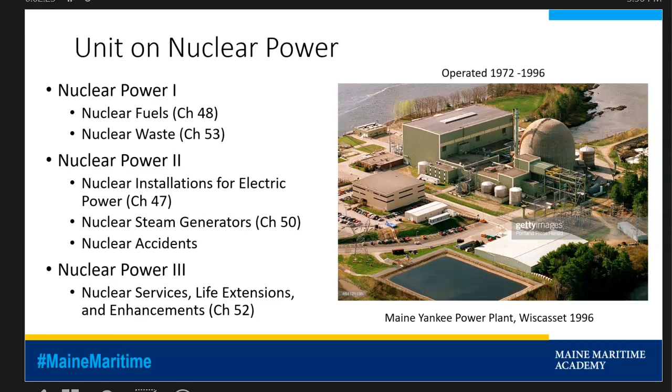Here's another place that you can get information from if you're curious, and this is also where a lot of this information came from in this PowerPoint.

There are only 2 nuclear reactors being constructed currently. That's the Vogtle Units 3 and 4 in Georgia.

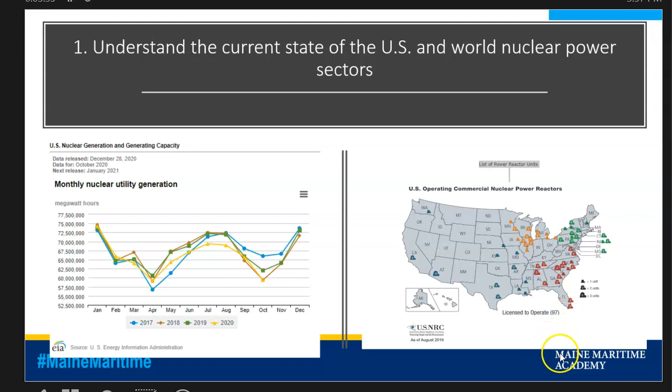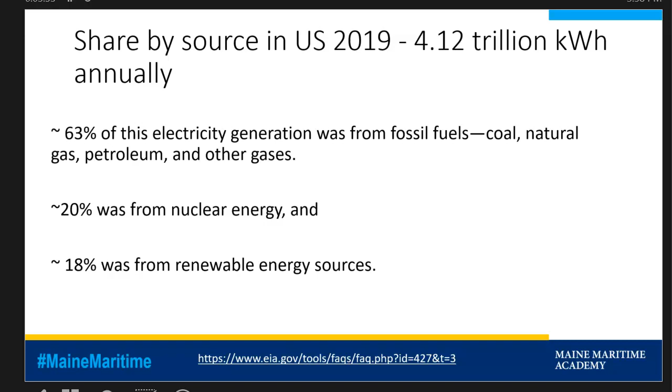So you can read this: 63% of electricity generation is from fossil fuels - coal, natural gas, and petroleum other gases. 20% was from nuclear energy, and 18% was from renewable energy sources.

TWh is terawatt hours, and basically this just shows how much of the world uses what type of fuel for power generation. You can see that coal is a big portion of it because it's so cheap. Fun fact, if you don't remember this, the U.S. is like the Saudi Arabia of coal, as it's for oil over there. So that's pretty cool. And nuclear is just this little 10%.

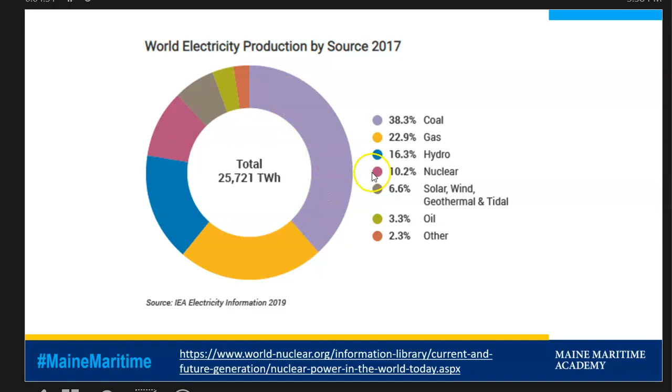In the U.S., we generate the most gigawatt hours, or the most hours of nuclear power, but it is not our main source of power generation. I believe we only use about 17% of our generation as nuclear power, as compared to France at 71%. So I think that's on your note sheet as well.

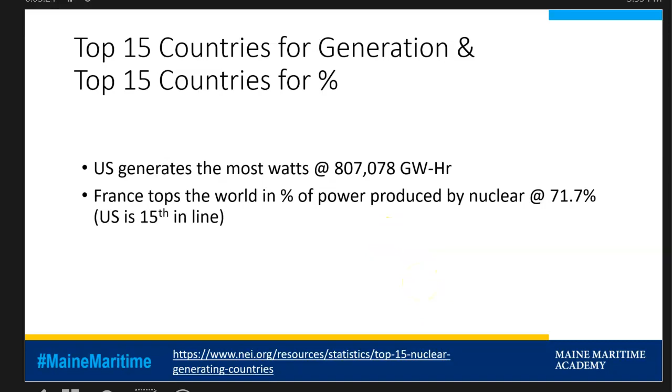From the atomic weight, bingo, most of the uranium is U-238. There's only 0.01% of U-234. There's 0.71% of U-235, the magic stuff that we typically use in a power plant. And 99.28% is U-238, natural uranium.

U-234 is such a small amount, it is insignificant. U-235 is fissionable, meaning it can absorb a neutron, become unstable, and split into multiple pieces. U-235 can sustain a nuclear chain reaction. This fission releases a massive amount of heat and is the basis for steam generation.

U-238 by itself cannot sustain a nuclear chain reaction, which is known as fertile. However, absorption of high-energy neutrons can cause U-238 to fission. Because U-238 by itself can't sustain the chain reaction, we need to have enough 235 to initiate fission and drive the chain reaction. Therefore, we need to enrich the uranium in order to use it as nuclear fuel. Fun fact, when 1 ton of U-235 fissions, the heat release is equal to burning 3 million tons of coal. That's insane.

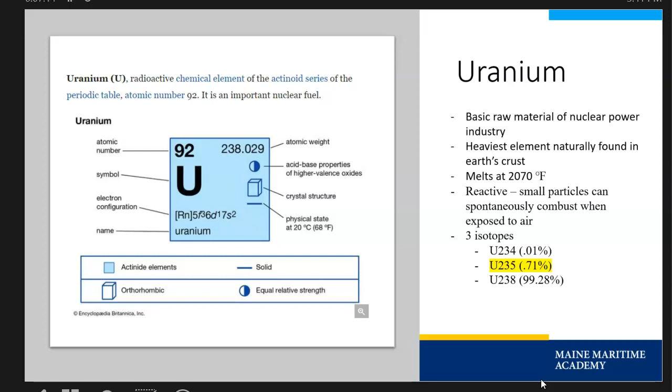Plutonium is a radioactive element with an atomic number of 94 and an atomic weight of 244. It is the only element with 6 different physical forms. Plutonium has a much lower melting point than uranium, but it must be melted in a vacuum or in an inert atmosphere because it is chemically very reactive to oxygen. All 15 isotopes are radioactive, decaying to stable isotopes of bismuth and lead.

The most commonly created isotope is plutonium-239, and it is primarily the product of fast breeder reactors, which are specifically designed to produce more fuel than they use. You can read more about fast breeder reactors in your book. They are basically reactors that make a little extra neutrons so that they produce even more chain reactions than a normal pressurized water reactor.

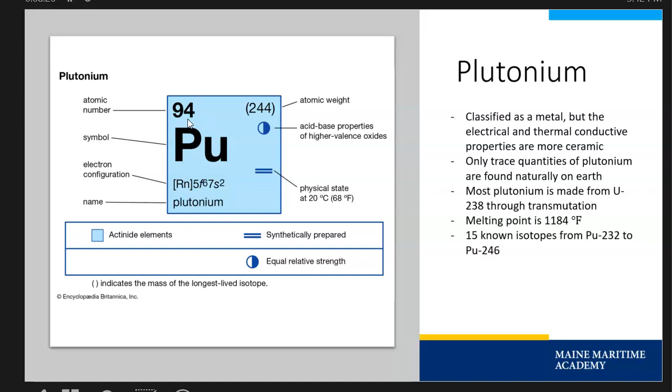Thorium dioxide is used to make gas lamp mantles because of its extremely high melting point. Because of its abundance, there was a great deal of research conducted using thorium. Absorption of neutrons in a nuclear reactor converts thorium to U-233, a fissile isotope that is not naturally occurring. There are no commercial reactors in the world that currently use thorium as the reactive element for nuclear fuel.

Proponents of thorium fuel claim there would be less nuclear waste production if thorium were used in a reactor. Supporters say there is low weaponization potential in thorium, unlike uranium and plutonium. That very detail, that thorium can't be used in nuclear weapons, is the reason research was halted in the U.S. in the 1970s. It's a pretty interesting fact. If the government has no use for it, neither do we, apparently.

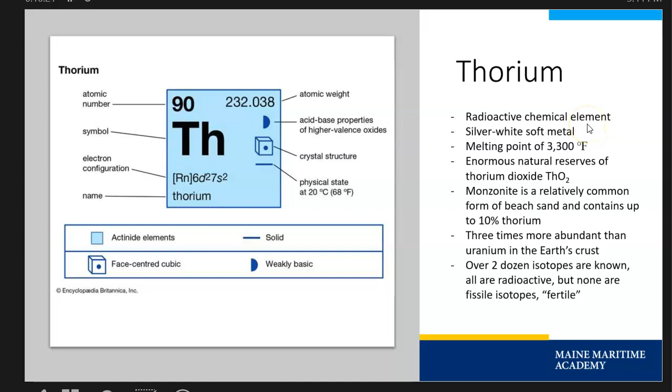But I've actually looked online because I was curious about this thorium. There are some pretty cool reactors called LFTRs that use liquid sodium or something like that with these thorium reactors, but they're all theoretical. There hasn't been enough research behind them. So just know it is one of the radioactive elements that could be used in a reactor, but we just haven't used it.

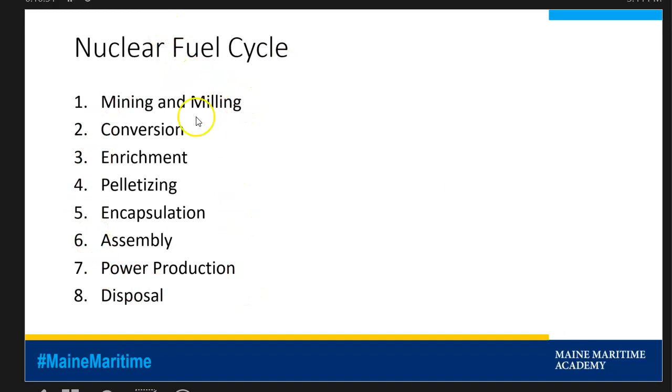Nuclear fuel cycle. These are things you need to know all about, and we're going to go over them.

Open pit mining, also known as strip mining, removes surface soils and rocks to get the uranium ore below. Uranium ore grades are usually less than 0.5%. Once the ore is exposed, a series of benches or steps are cut into the earth to make ore removal easier. Benefits include better ventilation and it's less expensive than underground mining. Downfalls are a huge footprint, waste piles, and remediation is extremely costly. Nearby communities can be negatively impacted due to dust, noise, and groundwater contamination. So no one likes to be neighbors with this thing. But who wants to work in a mine where you get radioactive black lung, right?

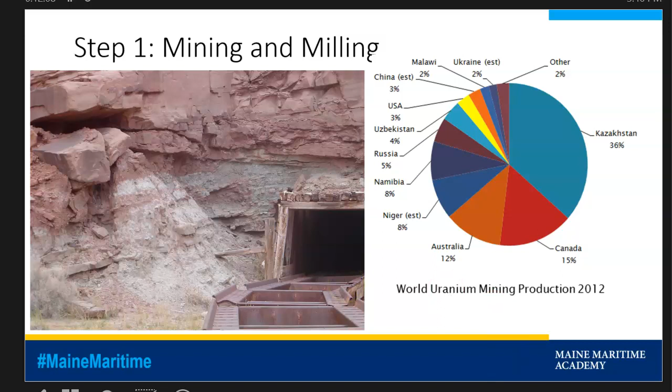Okay, moving on, underground uranium mining. Underground mining is used to reach higher concentrations of uranium that are too deep for open pit mining, usually greater than 350 feet. Uranium ore is dissolved by pumping solution underground, bringing it back up, and extracting the uranium from the solution. Benefits are a smaller footprint, less rock waste, and through advances in technology, less risk to mining workers. It's extremely expensive and there is potential for serious impact on local aquifers. Kind of like natural gas, you know. If we crack one of these layers and get into the aquifer, we're going to screw up a lot of people's well water.

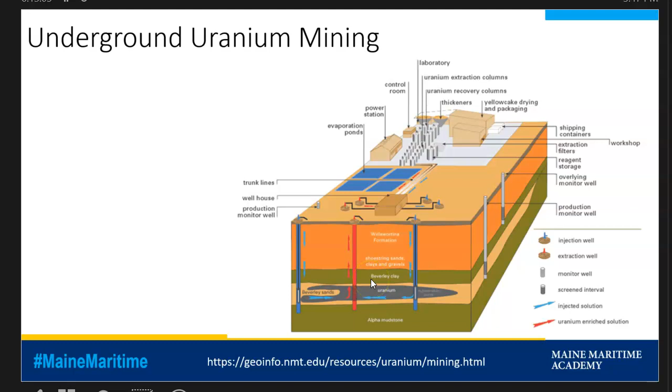Milling is the process where uranium is extracted and concentrated from the ore that has been mined. Ore is crushed and leached with acid and recovered using an ion exchange process. Excess water is filtered and roasted off. This milling process yields the yellow cake, which is U3O8.

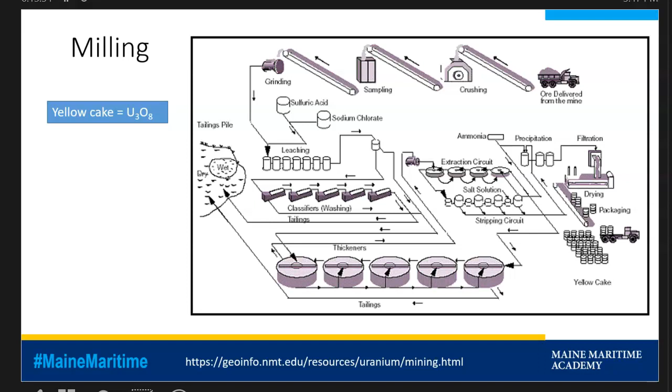It takes a ton of ore to mine 5 pounds of uranium. Only 0.25% of what is mined is uranium.

What you need to know here is that yellow cake is converted to uranium hexafluoride through a multi-step chemical process. Uranium hexafluoride is a gas, also known in the industry as hex.

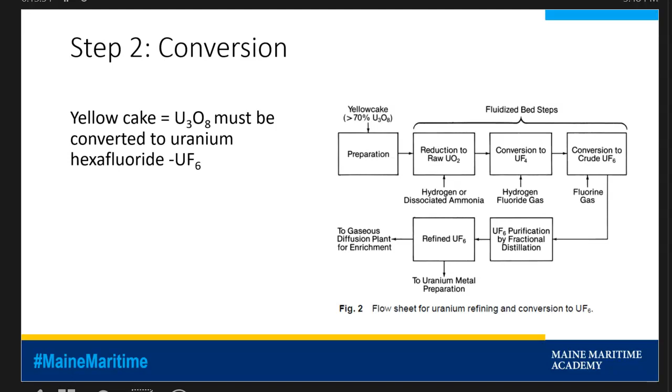At this point in the process, the uranium hexafluoride is at about 0.71% concentration of U-235. It is concentrated so that there is just the right amount of U-235 compared to U-238.

Through the enrichment process, the uranium concentration is gradually increased in a cascading method, either by gaseous diffusion or through a centrifuge. The centrifuge also cascades in nature and is done repeatedly until the appropriate concentration is reached. Only 2% of the energy is needed to enrich uranium during the centrifuge process compared to the diffusion process.

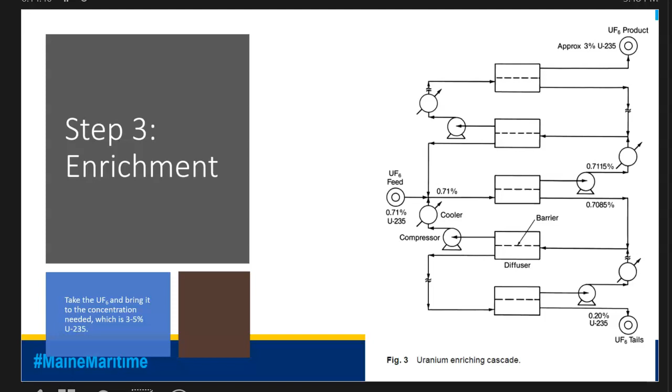So, pelletizing. The uranium oxide powder is blended and sieved to make a homogeneous lot. Powder is fed into dies and pressed into cylindrical pellets. Pellets are heated in a furnace at 3100 degrees Fahrenheit for 4.5 hours, ground and inspected.

A boron coating is added to the outside to help control the reactivity. You'll hear that boron chemical quite a bit in nuclear power because it is one of those things that slows down the chain reaction. It's also used as a moderator.

As a side note, this is how downblending occurs. Downblending is the process of taking highly enriched uranium used in nuclear weapons and reducing the concentration of U-235 to lower levels so that the fuel can be used in power plants.

In 1995, the Megatons to Megawatts program started downblending U.S. and Russian weapons grade uranium into LEU, low enriched uranium. From 1995 to 2013, the equivalent of 20,000 nuclear warheads were downblended to LEU.

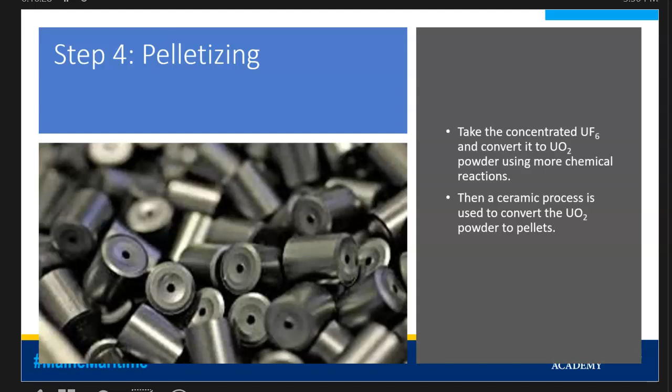Encapsulation, aka cladding. These tubes are made using zirconium through a cold tube drawing process, similar to what we saw in the video last semester on making tubing.

Each pass needed heat treatment, and there were several passes. Heat treatment occurs under a vacuum. Then the rods are cut to length. These are inspected several times. Samples are taken to verify the material composition.

Rods are put together so that the fuel pellets containing the proper amount of U-235 per rod are weighed and recorded. The stack of pellets is inserted into the fuel cap, which is welded to the cladding, and the upper level plenum spring is installed into the cladding.

The tube is then inserted into the weld chamber where it is evacuated, vacuumed out, and pressurized with helium. At the top end, the plug is welded. The rod is then checked for helium leaks.

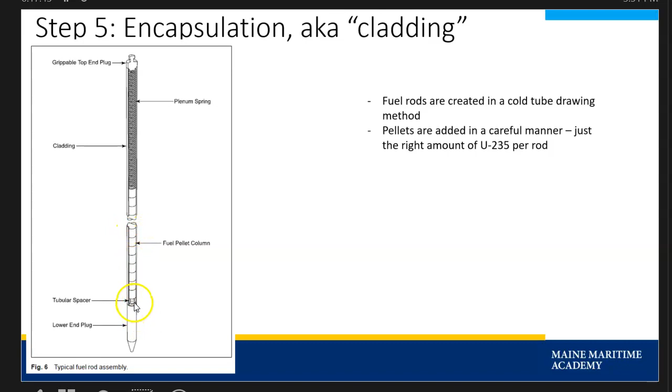So this is the assembly. The cladding's the outside part, and there's a little spring in there. Your fuel pellets are here. A little spacer for good measure, and there's a plug down here and a plug up here.

Assembly. Rods are then put together in these bundles. These steps are done in the horizontal position. There are upper and lower spacer grids that keep the rods in their correct position. Grids are made up of strips. Each strip is numbered and traceable.

The grid is laser welded at each strip intersection, meaning there are 500 welds per grid. All dimensions and welds are carefully checked. Grids are installed to fixtures to keep them steady.

The guide tubes are inserted and secured by welding them in place. Think of these like the stay tubes in a fire tube boiler. They provide rigidity and stability to the overall fuel assembly.

Fuel rods can then be inserted. They are scanned so that the correct rod is located to the correct spot in the grid. All is carefully calculated and documented. Then the assembly is put in the vertical position for inspections.

Bundles are shipped horizontally in licensed containers. There are usually 1 or 2 bundles per shipping container.

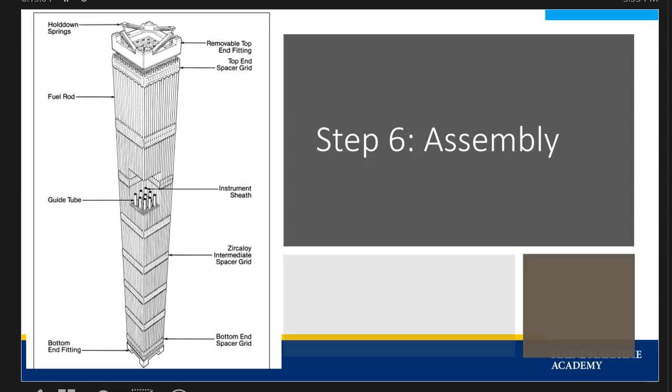The CANDU reactor design operates in a continuous refueling mode, so there is no shutdown required.

Most PWR, pressurized water reactors, were originally designed for annual refueling, where 1/3 of the fuel was replaced each outage. Through operational experience and data, the trend has been pushed to 18 to 24 months of runtime between refueling.

Fuel costs are higher when the shutdown occurs after more time has passed, but the longer the cycle, the more cost effective it is due to the overall reduced number of outages over the life of the plant. There are also fewer licensing submittals that need to be done, as well as lower replacement power costs. So less paperwork, less money, better to not have to do this so often.

Burnup is a way to measure how much uranium is burned, in other words, how much uranium has split inside the reactor, measured in gigawatt days per metric ton of uranium. Two decades ago, average burnup was 35 gigawatt days per metric ton of uranium. Now it is over 45 gigawatt days per metric ton of uranium.

This increased burnup capability means batch size reductions as well as longer cycles. Today's units are loaded with batch sizes once used for annual cycles and utilize a checkerboard scheme to replace the fuel bundles.

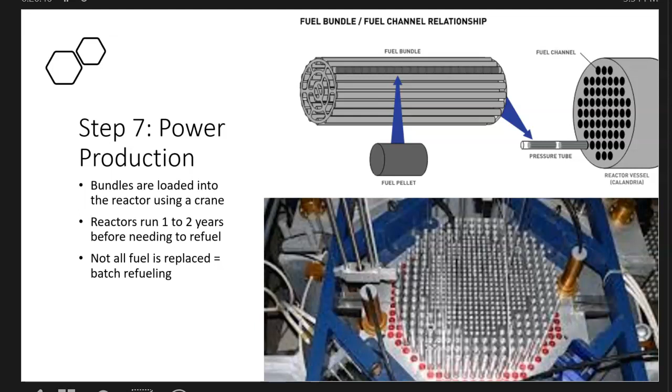As nuclear fuel is used, characteristics change. There are 4 things that happen, all dependent on the level of burnup of the fuel. First, dimensional structural changes of the fuel: there is growth, rod diameter can enlarge, and fuel density changes.

Second, the cladding, waterside corrosion, and hydriding. Early on during burnup, the cladding reacts with the water and there is a thin adherent oxide layer on the outside of the cladding. The oxide layer is impacted by the time the fuel is spent in the reactor. Neutron flux, water chemistry, and coolant temperatures must all be monitored.

Third, fission gas release. If there is a fission gas release, this can cause high internal fuel rod pressure.

Fourth, pellet cladding interaction, or PCI. This is when there is contact between the individual fuel pellets and the cladding. It happens when there is a rapid change in power level. The PCI occurrences have led to power maneuvering guideline development. It's also the reason helium is added inside the cladding, to help prevent this contact.

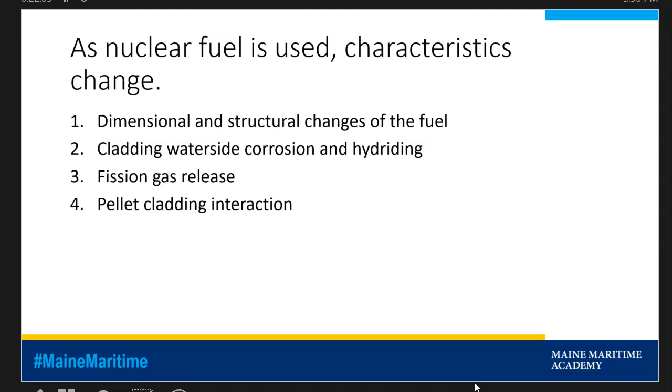Once the fuel is used, there are 2 options. Option 1: recovery of the spent fuel. Fuel can be reprocessed and used again to make power. This is the closed fuel cycle.

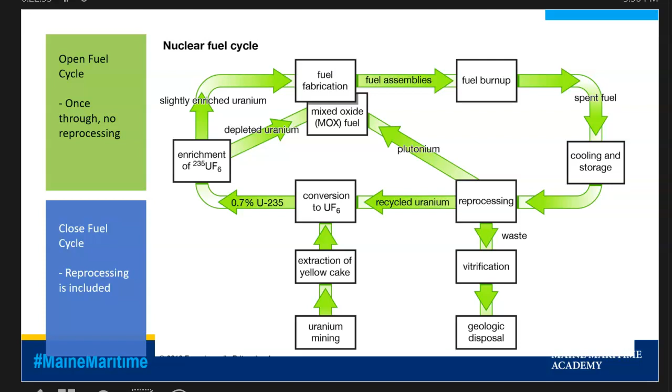Option 2: disposal. This is the open fuel cycle. Either way, the disposal of high-level waste requires safe, undisturbed confinement for hundreds of years. The goal of an integrated nuclear waste management program is to immobilize and isolate the nuclear material from the ecosystem until it's no longer a significant threat to the environment.

Since the 1970s, waste storage regulations have progressively been more rigorous. Every nuclear site was designed with the idea that there would only be closed fuel cycles, therefore they had only certain size spent fuel pools and did not plan to have long-term fuel storage on site.

In the 1970s, recycling spent nuclear fuel was banned in the U.S. The law was rescinded in the 1980s, but the damage had been done. Plants built later included designs with larger spent fuel pools.

The nuclear industry has met this challenge by working to produce less waste and have longer fuel cycles. Nuclear plants have re-racked fuel in spent fuel pools and utilized neutron-absorbing materials to lower reactions and therefore hold more spent fuel rods.

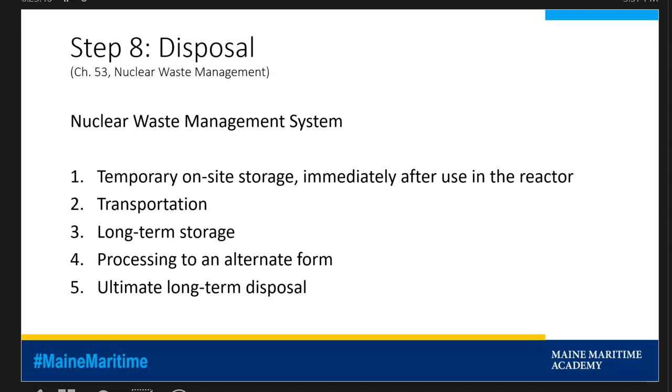Even with these changes, spent fuel pools can't hold all the fuel needed for the life of the nuclear plant. The level of radiation determines the handling and storage steps that are necessary. Above all else, we must protect the groundwater against contamination.

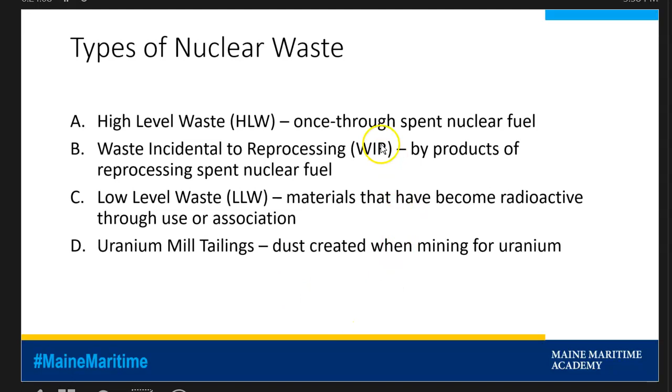Byproducts of spent fuel are liquids until they go through the vitrification process. This turns them into a solid. It's highly radioactive.

Federal facilities have been reprocessing spent nuclear material since the 1940s, such as from nuclear submarines.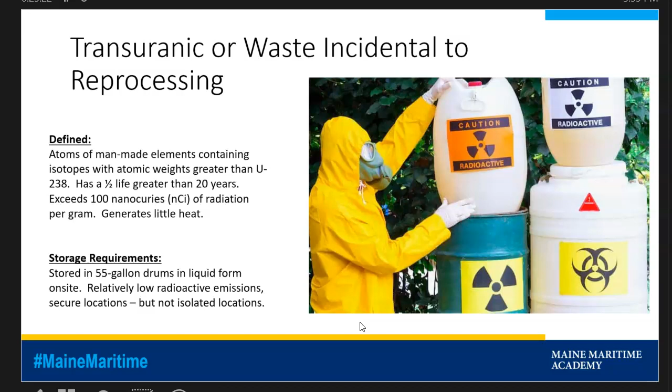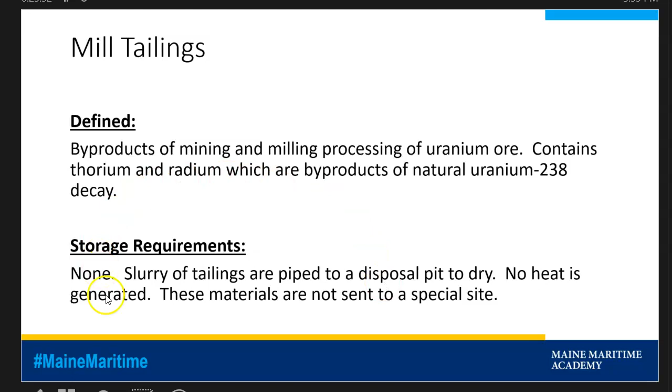Mill tailings. Here are the storage requirements for that. I'm not going to read it to you because you can look back at this.

Low-level waste. There are 4 subcategories of low-level waste: A, B, C, and Below Regulatory Concern, or BRC. BRC is so low that it is simply disposed of regularly.

Years ago, when the first commercial sites began accepting low-level waste in 1963, they would bury this waste only 15 feet deep. It wasn't successful. There were leaks and many problems.

In the 1980s, the Low-Level Radioactive Waste Policy Act was passed, which placed responsibility of LLW disposal on generator states and recommended regional facilities. Nowadays, the storage containers are much better. There are also vaults either above or below ground.

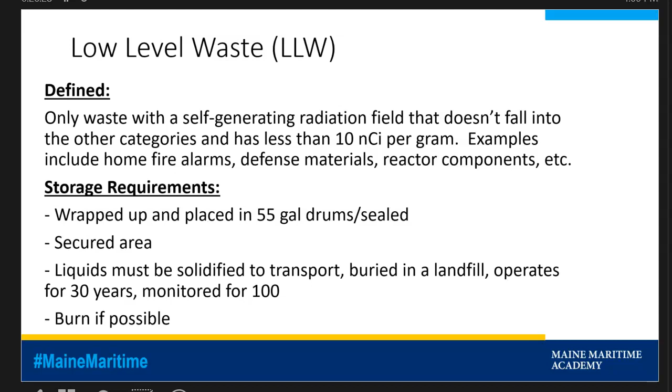Part of the regulations of 1987 were that the EPA and the NRC established that repository standards must include: any stored spent fuel or HLW must be recoverable for 50 years after closure. Waste packages must be leak-proof for a minimum of 300 to 1,000 years. And only phased release of nuclides would be permitted for a subsequent 9,000 years.

A number of options were considered for long-term HLW storage: geological repositories, under the sea, under Arctic ice, and launching into space. The only geological repository option made financial and practical sense. It was suggested and tested at the Climax mine in Nevada, using vertical boreholes in conditions studied for years, and it was determined to be a safe option.

The greatest challenge is finding a suitable location, away from national parks and away from large populations. We also need to find the right geological media. It has to have rock, salt, granite, or clay, because those are hard, impervious types of media. We must also consider the value of materials left behind that can't be mined ever.

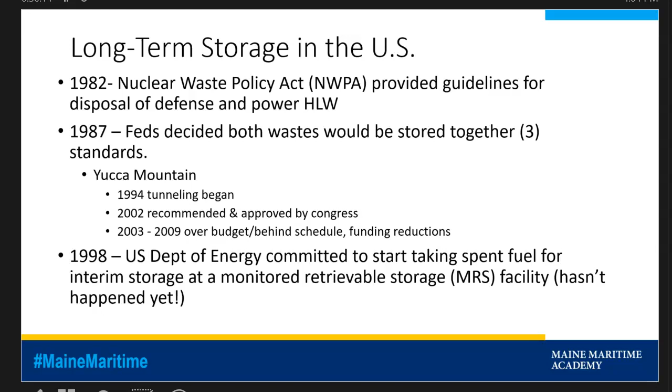In 2012, Obama established the Blue Ribbon Commission on America's Nuclear Future to recommend policies, procedures, and new strategies. Some recommendations were new facilities, siting processes, authorization of consolidated interim storage facilities, and establishment of a new waste organization. In 2019, President Trump's administration made a play to reclassify waste from nuclear weapons, prompting backlash from all the states that contain these federal sites. At one point Trump supported refunding the Yucca Mountain Repository, but then decided against it after intense protest from Nevada. The search for a solution continues. Wow, what a sequence of events.

The picture on the right is from Maine Yankee, Wiscasset. This is their Independent Spent Fuel Storage Installation, or ISFSI. There are about 542 metric tons of spent nuclear fuel stored at Maine Yankee. According to them, it costs roughly $10 million per year to maintain the 64 canisters of radioactive waste. Millions of dollars of damages are being paid to facilities for costs associated with keeping spent nuclear fuel on site.

Every few years, Yankee Atomic Company sues the DOE for damages. ISFSI sites must be protected 24 hours per day by heavily armed guards, and they must keep up with inspections.

This figure from Steam 42 shows how a dry storage cask is put together. The spent fuel bundles are loaded into a thin-walled steel canister. This canister is dried, filled with an inert gas, and sealed welded shut. The canister is transported to the storage overpack module, which is the thick concrete case. The casks provide shielding from radiation and have built-in ventilation for cooling.

New nuclear plants are designed for 80-year lifespans because there is no long-term spent fuel storage solution. They need to be prepared to store the fuel in ISFSI, and must be designed to hold the fuel for the lifetime of the plant.

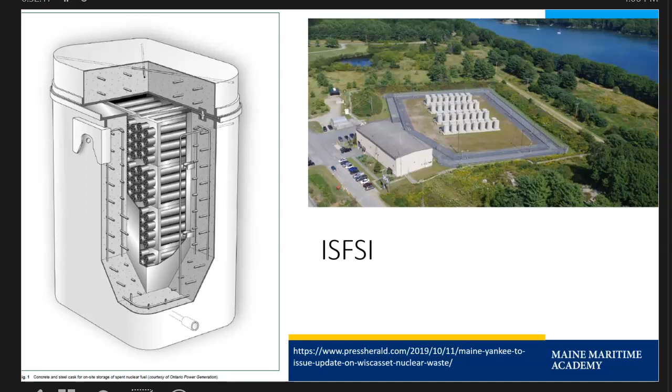Fun story here - I actually have an old boss who works there. He used to work at a nuclear plant down in Florida, and now all he does is hang out there and get paid to sample the water every day to make sure it's still radioactive and check how much it's decaying. He makes a stupid amount of money to do that, and he's home every night. So that's just another thing you could get into.